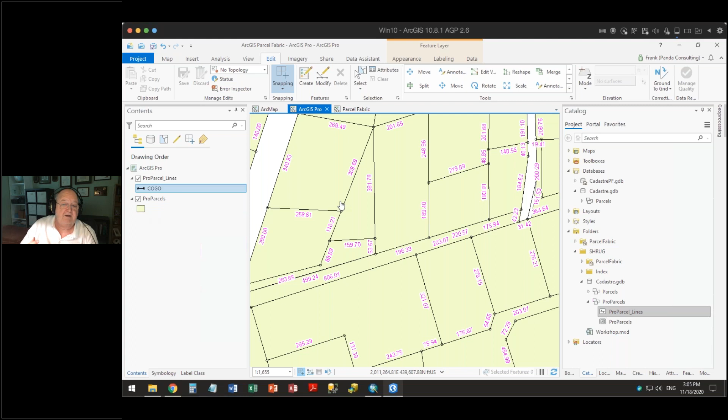One thing you'll notice is there's an awful lot of similarities between them. While the interface is a little different, they can work on the same data with a couple of exceptions. This is ArcMap here, and over here is ArcGIS Pro with the exact same data in a map. This is the ArcMap data, and right next to it is the ArcGIS Pro data. Excuse my horrible green coloring, but I wanted to use that to start with something for symbology, and over here is the parcel fabric.

We can go ahead and close this, we don't need that parcel fabric in this workshop anyway. All right, so just to start, I'm assuming that since this is a parcel mapping workshop...

...that we're somewhat familiar with terms such as COGO and things of that sort. I'm assuming that's valid. So let's just review a little bit about how the structure is on these feature classes that we're editing against.

If we look at the actual line feature class we're pulling in here, we have some standard COGO fields: angle, distance, radius, delta, tangent. Then we have another field called record boundary type, which this county actually had populated. Then we had side, arc length, and dim code, and it looks like they'd done some work to find the nearest other feature.

But let's start with the angle. The angle actually represents the bearing of a line. A bearing denotes what direction a line is, and it uses, in most parts, a quadrant bearing, showing the angle from north toward the east or north toward the west, and from south toward the east or south toward the west. You'll notice here, and this is the biggest difference between ArcMap and ArcGIS Pro...

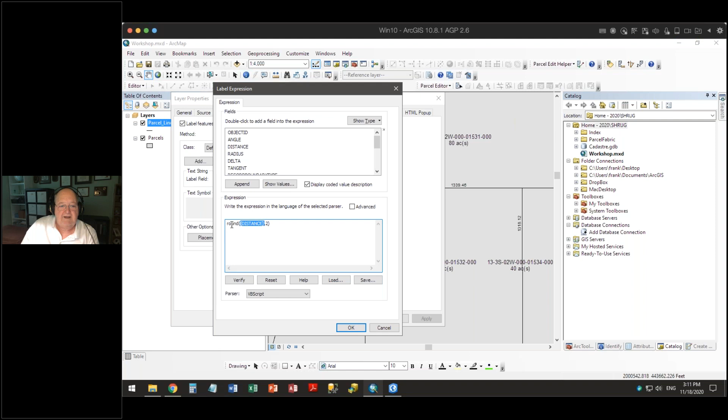For example, if I have a label on here, which I do have on my lines, I can go over to my labels and define what my expression is. I can see that for my label, in VB script, I've told it to take the value stored in the distance field and round that value to 2 decimal places so I could show what the actual distance is here.

So when I am beginning to draw something on here, I would start by editing. Then I would make sure that my Cogo attribute field, or my Cogo toolbar, is open, which is located here. And then I could go and begin a traverse.

Now in the traverse, one of the things I want to watch out for is whether or not my units have been set in my actual ArcMap session. So I'm going to go down to my editor options, go to units, and make sure, this is normally what happens, I need to go and set it to quadrant bearing and to degrees, minutes, and seconds, and hit apply. Notice there's also another section here, ground to grid correction.

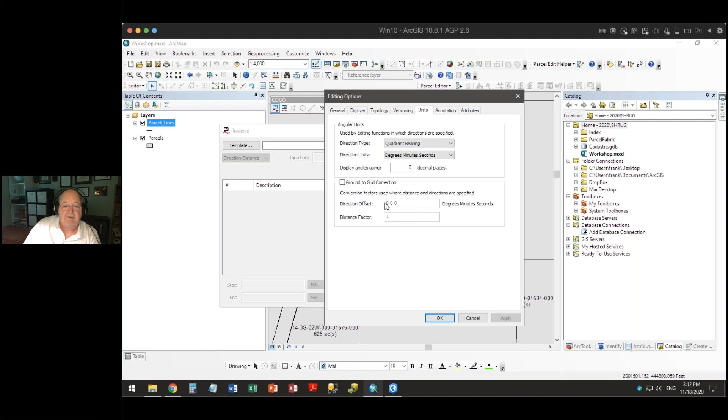If it turns out that I'm using ground bearings or ground distance, and I wish to project it up to the grid, I can go and tell it what my bearing offset is here and what my scale factor is here also. Most organizations don't get involved that closely on it.

So now I need to set my template and say I wish to go and utilize parcel lines on here. And why is it still not working? Set those in here.

Interesting. Oh, I need to, I guess, start my start point. I have to tell you, it's been so long since I've used ArcMap. And then the next thing is I need to put in my bearing.

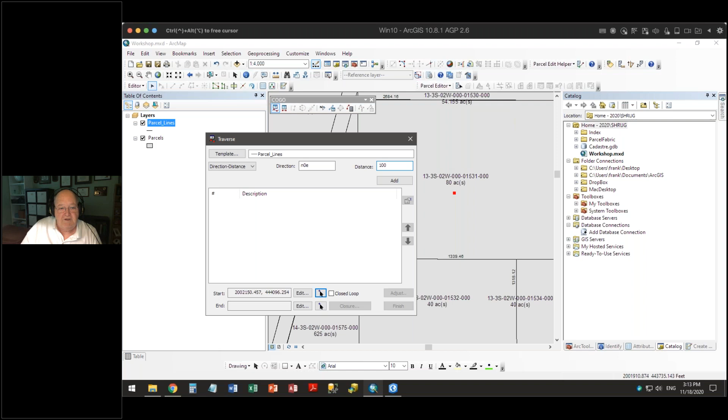In this case, I'm going to go north, 0 degrees east. I'm going to hit tab. And then tell it I wish to go 100 feet north and hit enter, and that will go and input that value for me. I can then say north 90 degrees east and hit enter. Then I can go south 90 degrees east and hit enter.

Oh, sorry, that should be south 0 degrees east. One more time here: south 0 degrees east, and then I can go south 90 degrees west for 100 feet to close out. An interesting thing about this is that I have not yet created anything.

This is merely creating a sketch for me. It's creating a sketch, and it's only when I hit finish that it actually is going to go and finish on here. What I'm going to do is take and save this traverse out.

And real quickly, I'm just going to go and save it to here, call it test traverse. And I'm going to save that, and I'm going to pull it in later when I begin doing this editing. So only when I hit finish do these lines actually appear.

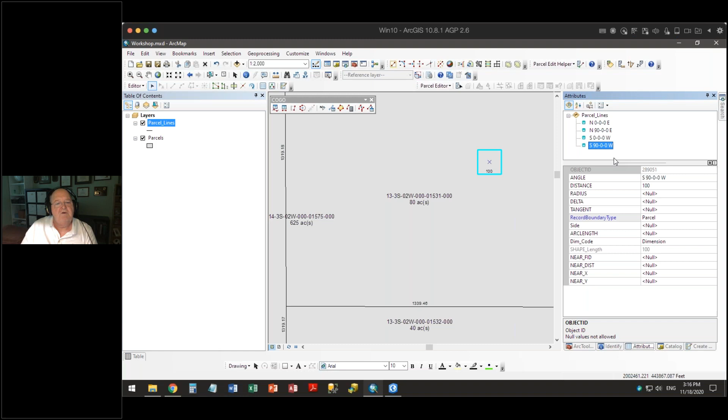If I look over on my attributes, here are my lines for me. So if I wish to go and move that, what I can do is, I can see, by the way, I have a selection anchor here. I can hold down my control key and move it down to and snap to one of the corners there, and I can move this down and snap it in place there.

So I can go and draw this, make sure this matches. And then I have the problem of, well, how do I make sure that this bearing in here matches exactly where it's going? And then down here, how do I go and do this?

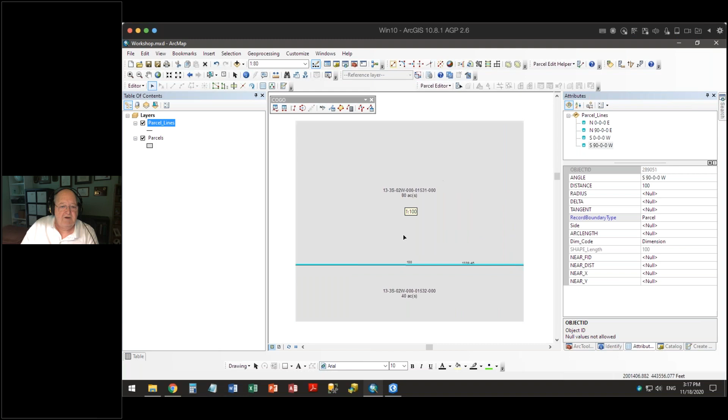Inside of ArcMap, we found a lot of ways to cartographically do this. One of which we might go and, rather than starting and just doing the open traverse, we might rotate it or move it down, but we can see already that these lines don't coincide with the adjoiners. So we'll have to do some sort of an adjustment on here to make sure that this fits exactly where it's supposed to fit. So let's go and push this up here.

I can go and do sort of just some standard edit routines on here. And I can take this again and say, well, let's go and edit the vertices, and I can move those vertices down to here.

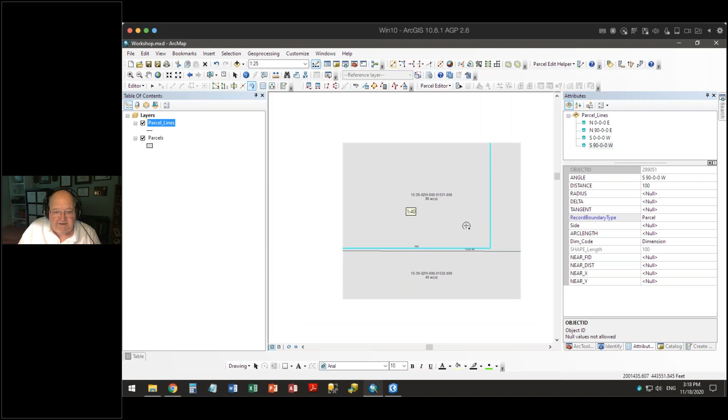There's a couple things I can do. I can go in and do a rotate on here. It will use whatever my selection set is and give me, there's my rotate. And when I go over here and I hit S, let's make sure I can toggle this. S, it gives me a snap line.

I go in here and then rotate that so it fits in there. Again, that made one line fit. If I click over here, I can see that line doesn't fit anymore. So let's get out of here and instead select this line and select this line. Let's rotate just a single line instead so that it fits.

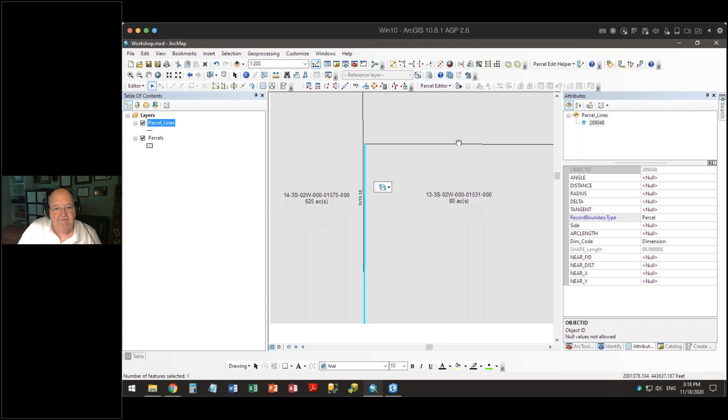And let's extend the other line on here. Again, I tell where I want to rotate around, then go and hit S to get my second snap. Make sure I get on my rotate tool. Here's my second snap anchor.

I can go and rotate it and have it fit. Now this line here has not been extended yet, so I have to go and extend that all the way to this line here. Again, a couple ways of doing this. I can tell it that I want to go and edit the vertices and then extend it that way, or I can use an extend button and do that. But again, these are standard type of edit tools on here.

Once I have that in place, I can now go and select these lines, and I hold down my shift key in here, hold down my shift key to unselect the other elements in here.

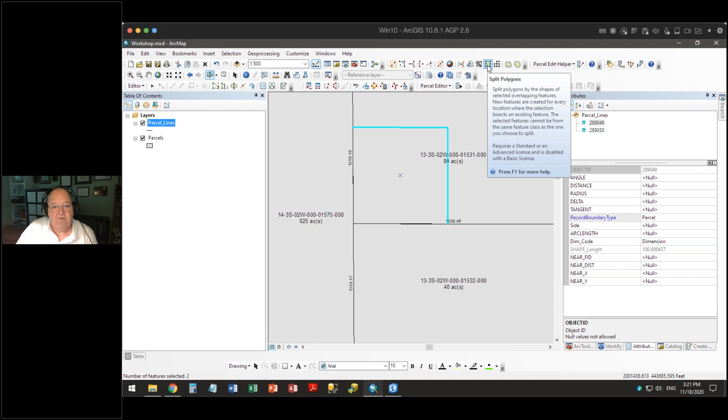So now I can take this and I can go and split this. I can do a split polygon on here. So polygons I have here. And I can split the two polygons in here, just having the same attribution. I then go in here and edit this, and maybe this is 5.2 here, and my acres, 1 acre or whatever it is.

Right now, this isn't much better than just simple drawing, and I liken this to what happens when we go and use just very fundamental tools. This is cartographic mapping is what we're doing here more than anything else. We're just mapping the cartography on here. So I'm going to get out of here and go over to ArcGIS Pro instead.

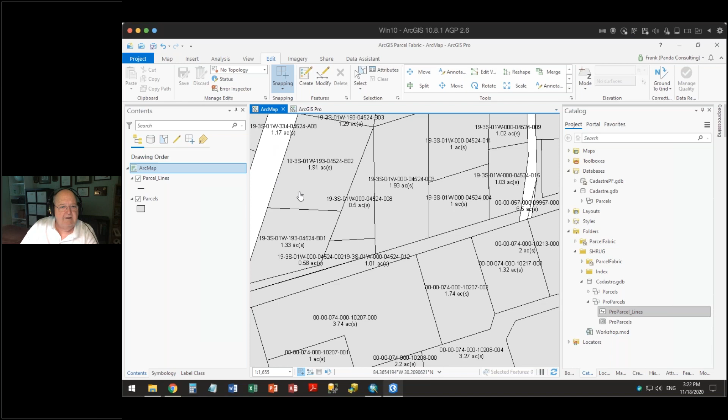And I'm going to go and find someplace. Let's go back here. I'm going to go to ArcMap to locate. I'm going to go and tell it to go and locate this parcel here. And you can see how quickly it zoomed over to that parcel.

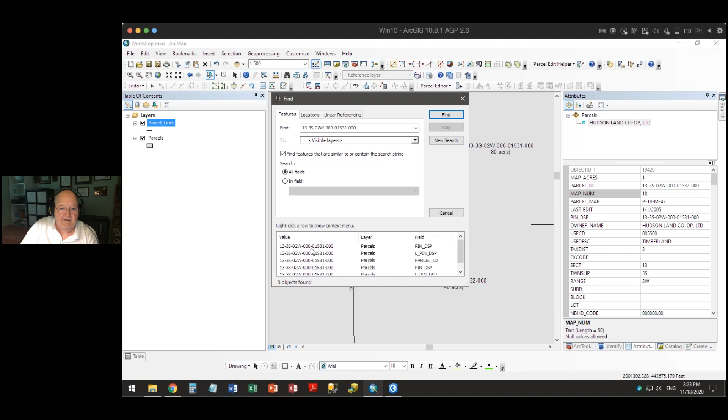Inside of ArcGIS Pro, it's the locate tool. The locate tool is located over on the map ribbon over here. And you can go and search through every single layer you have in here. With this, you can tell it what you want to match, how you want to match it and such. Actually, the locate tool is much faster in there. But let's do the same thing that we just did.

Let's start with comparing the structure of the line feature class. Because I can tell you already, the polygon feature class is exactly the same. There's no difference in here. But the line feature class, there is a difference.

And the first difference you'll notice is, how do I get at the properties of this? How do I get to look at this? In this case, it's a data designer, and it allows me to go and look at the fields that are in here. And when I look at the fields, I can see I still have an angle field. And that angle field, in this case, is still text.

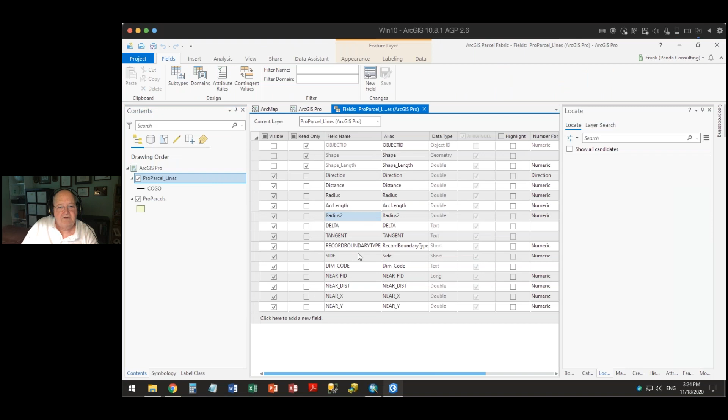But when I go to Pro, that line feature class, instead of being called angle, it's now called direction, and it's a number field. If we look down here, all the distance field, the radius field, the arc length, radius 2 field - these are all number fields in here.

And the number fields themselves can be set as far as how many decimal points we want after it, whether we want to pack it with zeros, whether we want a separator on it, whether we want a suffix on it. Maybe we want to go and put a suffix on here when we go and see these in our attribute tables and such.

So the first thing is the difference between the structures as far as the line feature classes. The line feature classes inside of ArcGIS Pro, whether it's just standard Pro or whether it's Pro Parcel Fabric, the COGO attribute fields are actually number fields.

And why is it number fields? Because Esri has recognized that when you use line and when you use number fields, you can actually begin to evaluate and analyze, and you can calculate what's the difference, what's the variance between the distance that's stored on the deed and what it's actually mapped out as, or what's the difference between the bearing or the direction and what it's actually noting on the deed. So you can begin to do calculations on there.

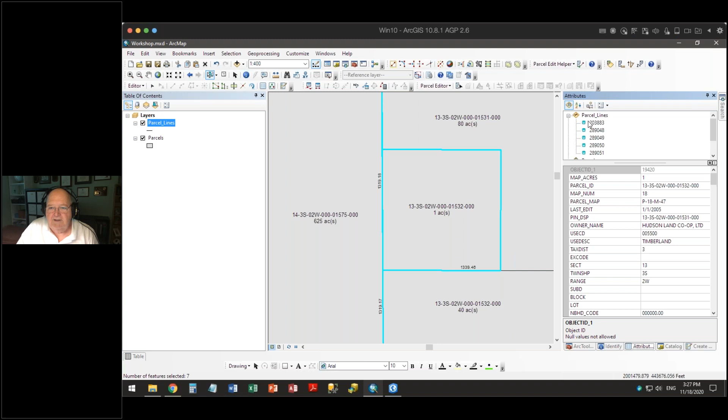Now we don't want to save that. So let's look at the next thing. Once we have that in place, I just want to make sure I have this correct here. And look at my lines - they have the distances stored, but they don't have an angle stored on them. So for some reason, it didn't store that on there for me.

When I go over here and I want to go and create a traverse on here, the way I start is, again, I want to make sure that my units are set correctly. So I'm going to go to my options and go to my units, go to my distance field, make sure it's set to feet. My angular units are degrees - let's make them DMS. Area units are going to be set to acreage. My direction units are going to be set to quadrant bearings.

And then I'm going to go back to my actual document. Another thing you'll notice is that with ArcMap, I had to start editing, then I also have to save edits. Within ArcGIS Pro, by default, there is no start and stop editing. If I have opened up a data set, by default, I can start editing it immediately.

Now, if you don't do a lot of editing, you may not want to go and do that. And there's two ways to achieve that. The first is over in the table of contents area, there is a tab for editing. And if I uncheck these layers, these feature classes, it will not let me edit them. So I can bring things into my project file but not edit them - I can turn them off and it works fine.

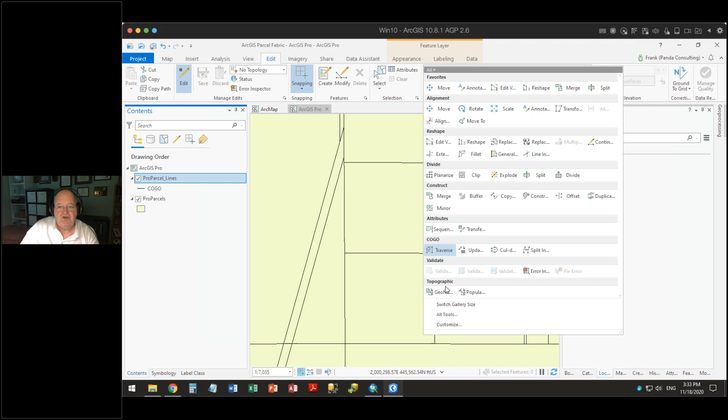If I pull that down, it will show me all the tools that I have. I can actually switch the size of the tools in here to see them a little bit bigger if I'm having problems with them, and I can scroll down and see all the tools in here. I actually have a traverse tool here.

But in addition to that, if I pull this down and say show me all tools, it turns out that there's a pane in which you can go and have every single tool here. And you have the same option - you can make this small items, or you can make this a list of just the tools that you have as you're getting used to this. I'm still not sure what my preference is on that.

But there's also another thing in here - you have all your standard tools inside of ArcGIS Pro, but then you can also create your own tools, your favorites as far as what you're editing. That's as simple as going down to the tool that's yours, right-clicking on that and saying add to my favorites. And now when I go back up, here's my traverse tool, the tool that I use all the time, so I can go in and begin with that.

So now let's start. With this, remember again, my COGO fields are not text fields - they actually are real number fields. So I can start the same way I had to start before. I have to set my standard direction, and I can do the same thing - I can input these values in.

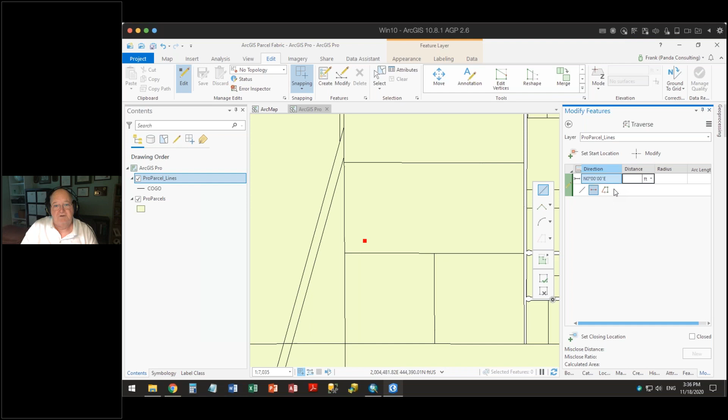So here is now importing this. I could go and put north 0 degrees east, enter, not tab, but enter. And I did 100 feet and hit enter. Now, one of the main differences here is that inside of ArcMap, every time I put a course in there, it was creating a sketch. In this case, it's not creating a sketch. It's actually creating that line every single time I hit enter, creating the line on here.

So now I could go in and type out, well, maybe it's north 90 degrees east on here for 100 feet.

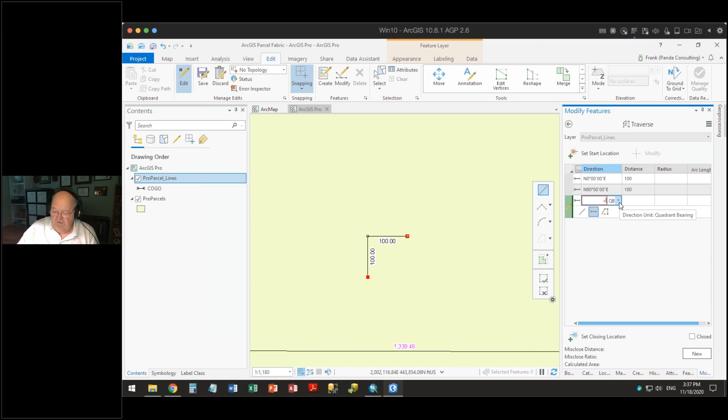Or I can type out how much of a deflection angle. A deflection angle is when I start here and I turn to the right. Deflection angles to the right are positive, deflection angles to the left are negative. So I could go and type in here, well, maybe I want to go plus 90 degrees, 100 feet, and maybe plus 90 degrees, another 100 feet.

And this automatically will tell me that it closed and that it's 0.23 acres enclosed inside of here. Notice it's automatically labeling it for me also, so that's just part of what's coming out of here. So when I'm done, all I really need to do is get off of this pane because it wrote that every single time on here. So I don't have to go and hit finish or anything else in here.

So here's another big difference between ArcMap and ArcGIS Pro: the way in which you select things. Inside of ArcMap, when I select it, I can draw a rectangle and do a selection, and every time I do that, it goes and makes a new selection. But in ArcMap, if I hold down the shift key and then do a selection, it would take off what I've already got selected. Not in ArcGIS Pro. In ArcGIS Pro, to remove something from a selection, you hold down the control key and do that. Shift key adds, control key removes.

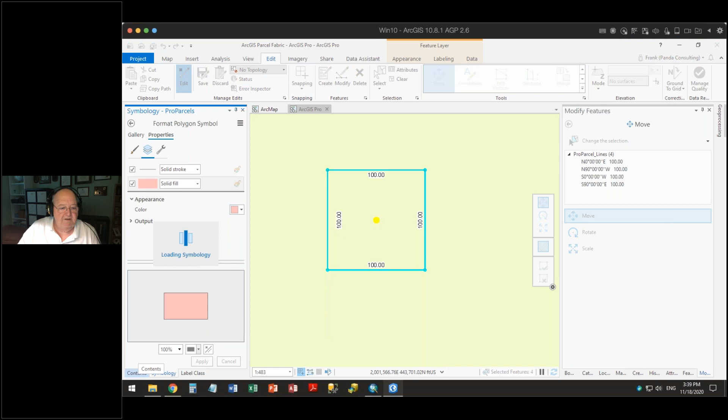So now I've gone and got that in place. Let me go and move that now. We go and move it, and you'll note also, rather than, let's change the color on here. Instead of green, let's make this something that might be a little bit easier to see. All right, you'll see this yellow dot here.

That's to replace that crosshair that was in ArcMap. If I hold down the Shift key and move my cursor over it, I can then go and snap it to this point here. I can then, while I'm clicking on top of the dot, go and move it down to there. And notice it's not finished until I actually click finish my move.

And I should see the exact same issue here, and the exact same issue here, and how to go in and make those fit.

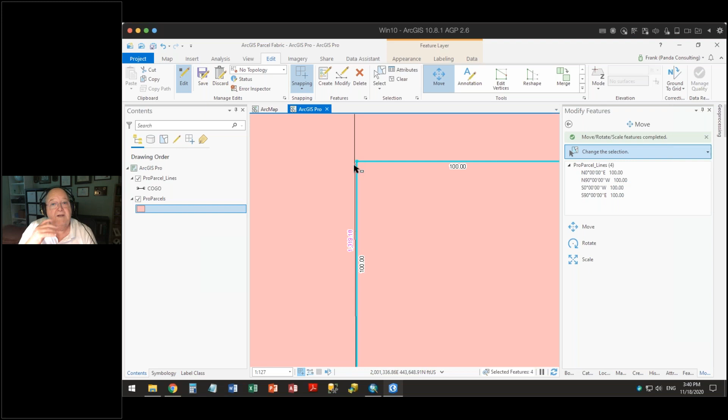I could do a rotate, and again, rotate is much like it was before. Hit rotate. Instead of that X, that little crosshair, I now have this. I pull this down, snap to here, and I can rotate by either holding down in here or holding on the actual feature that's selected. And if I note, as I move my cursor over, it's showing me I can rotate from there, or I can rotate from there. But if I try doing it in here, it's not going to rotate. Same way with the old way.

If I wanted a second snap key, I could hold down S. The difference is now I can, wherever my cursor is, that's where the snap key becomes. So then I can say, let's move that down to here and say, rotate it until it snaps to there and finish it there. But that's not the most efficient way of doing this.

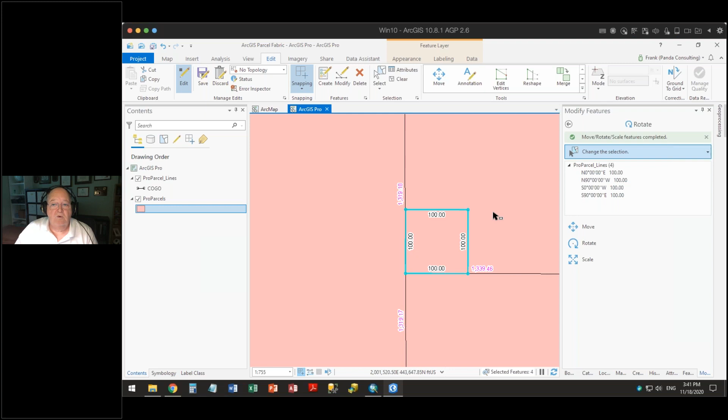Inside of ArcGIS Pro, we have some new tools, one of which is called the Align Features tool. Now, what this Align Features tool allows us to do is to go and draw a path, an alignment path, and it will go and find everything that's inside the tolerance that we input here. I'm just going to put 5 foot just so we can see.

And I can say, let's draw a path, and this is pretty far up here. Make sure that it goes and coincides with that boundary line. And if I look, I now have told it that everything that's inside between this buffer here, this tolerance, I want every vertex to go and snap over to this path that I just drew.

All right, and I can tell it things like both sides, left side, right side, preserve the shapes. I'm just going to go and do the simplest one here and say, go ahead and snap that over to it. And if you note, it went and automatically moved the vertices over so that they were in alignment to that old existing boundary line.

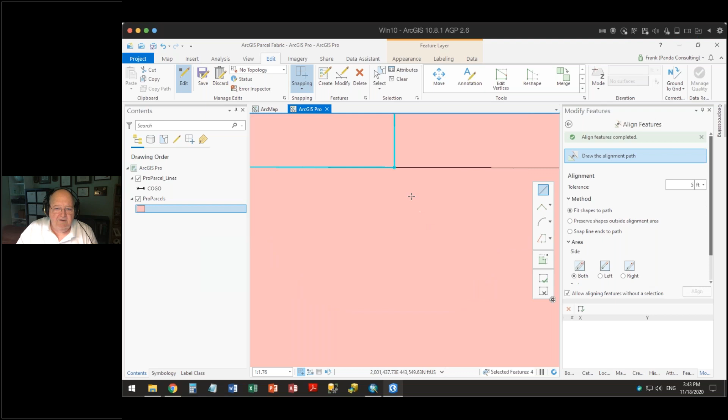Well, what did it go and rotate? How did it do that? And if I look here, it didn't rotate it. It's still the same. But what it did is it took that other line, those 2 lines there, and modified them so that they are extending out to that exact same line on there.

All right, simple traverse on here. Again, I can save the traverse. I can recall this traverse on here.

One of the things you'll also note here is that with my labels, some of these labels are black and some are red, pinkish color. Why is that? Well, it turns out that the labeling of the lines in here are done with a label routine for Arcade.

If I look at the label properties on here, this is the Arcade label expression. Remember, the values that are stored are actually number fields, so it's storing true numbers in here. And this is Arcade, by the way. If you're looking for a language to learn, this is the one to learn.

This is used multiple times inside of all of ArcGIS products throughout there. But it basically is a subset of JavaScript that allows you to go and set things such as whether or not you're going to show the bearing on here, what parameters are you going to put on here, what error strings are you going to put in here, what's the format, what's for color and what's for what, what happens if you have invalid COGO on here?

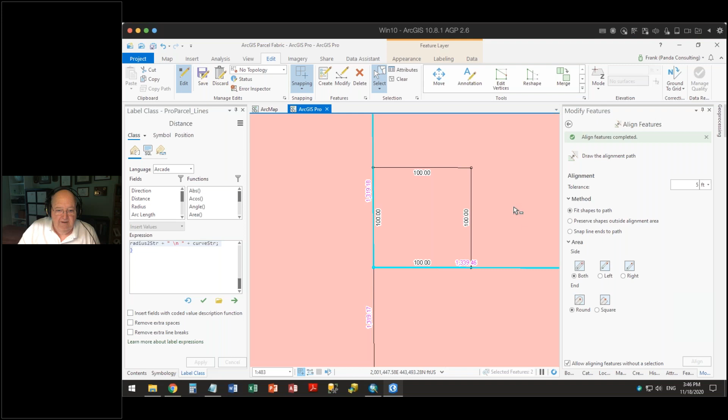And to prove that, let me go in here and select that one line that I have here. That's this line here. And let me go and type out a bearing on it and say, well, let's just say this is north 90 degrees. When I do that, it immediately changes from red to black, because it now has valid COGO on it.

So inside of ArcGIS Pro, it can tell you whether or not it's got real COGO values on it, or whether it only has partial, or whether it's not valid as far as everything that's in there.

Let me go by here one more time, just to show you the flexibility here. If I turn it on and say, don't just do the distance, do the distance and the bearing on here, it will actually go and, without making any major changes, because it's calculating it from the values that are stored, it will go and change what's actually being displayed.

That, by the way, is list by labeling, and it tells you what's being labeled, sort of replaces the label manager.

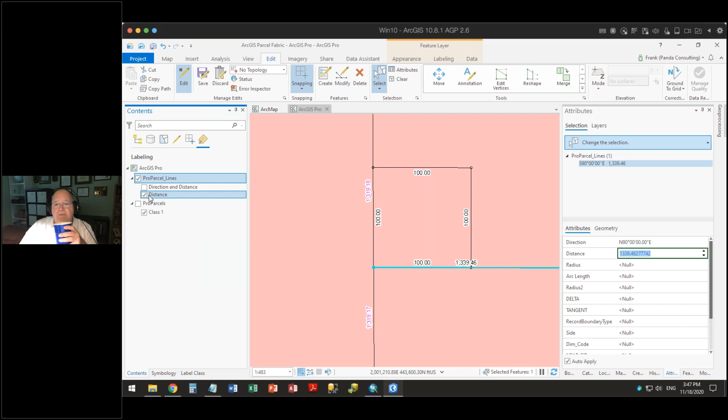All right, let me get back to where I was before. Let's unselect these things. Let's have just the 4 lines selected on here.

Now let me go and do a clip against this to go and calculate where the values are here. Again, I can go here and say, show me, where is clip? The clip on here. And I have an option to say, what are you going to clip out? In this case, I'm telling it, clip everything that's available to clip. So we'll clip the existing polygon layer, and we'll clip the lines in here.

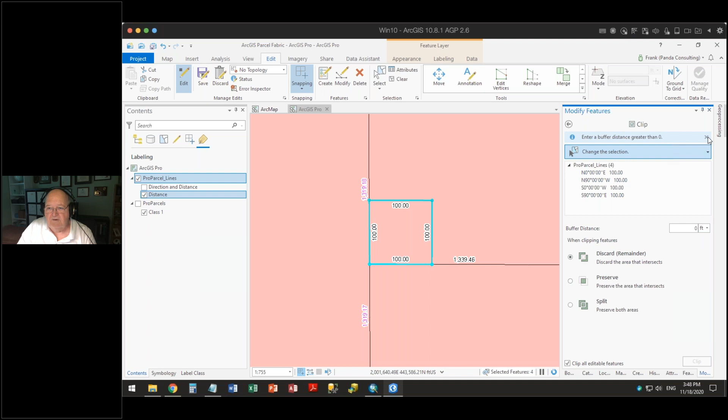So it will give you new information on here. And here's the buffer. And let's change this. Here's what I'm going to clip. And then the question is, I guess I have to have something turned on.

So everything is editable in here. Interesting. Let's do it with a split instead.

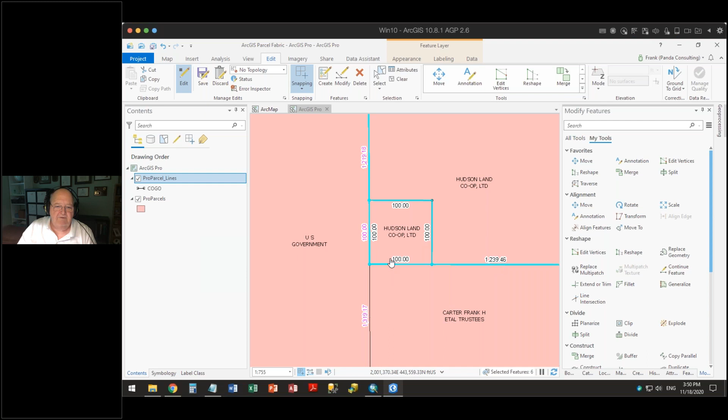And let's split these, and I should be able to split here. There's my lines, and this is what I'm going to split out. All right, and here's my parcel that is going to split. So go ahead and split these. If you note, it took this 100 foot and subtracted it off of here.

So I now have this line split, and here's the remainder just to prove it. Let's go back, 1339, 1319, and then let's go back and redo the split, 1239, 1219. So it automatically went and split the polygon on top of it and gave me a new parcel here, and gave me the remaining parcel.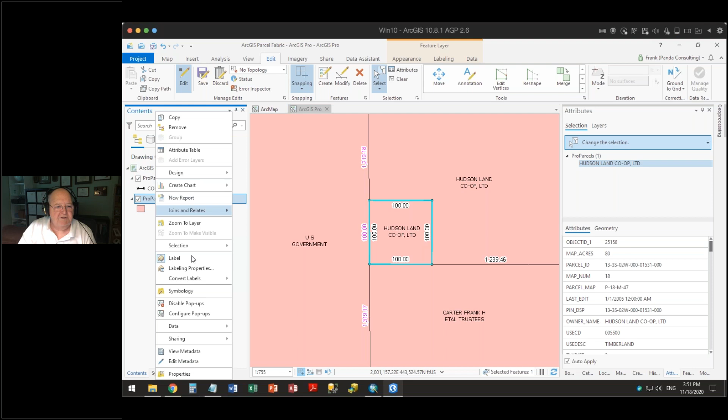All right, so I can go and put the new parcel identifier on here. Let's go and change this so that we actually label not the owner name on here.

Interesting, note that this is an Arcade expression, not Visual Basic. By default, Arcade is what's used in ArcGIS. So let's go and put this here and have it show those values for me.

Well, let's explore this a little bit more because this is not Visual Basic, this is Arcade. So first of all, let's change this so that that's 2 there.

And let's explore this a little bit more and create a label with this that shows not just the parcel ID, but maybe it has a new line in there, and then after that new line, it has the acreage in here.

So inside of Visual Basic, I might do that by creating a VB new line and then taking the shape area, dividing that by 43,560, and rounding that to 2 to get it to work. Inside of Arcade, slightly different. I'm going to use a plus instead of the ampersand to concatenate things together.

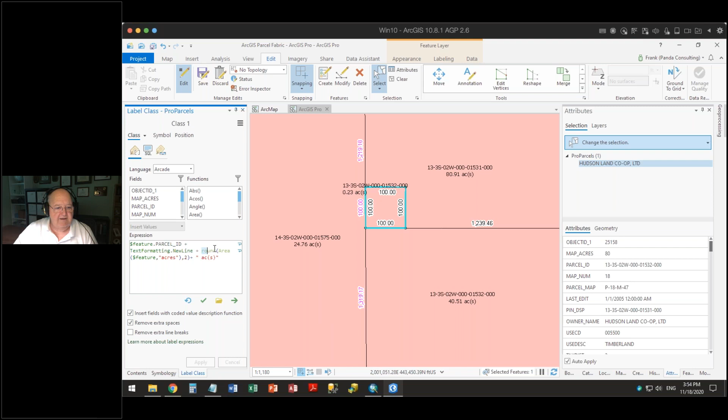So again, just to show you some of the techniques that are in here for doing labels inside of ArcGIS Pro versus labels inside of ArcMap. The more flexibility you have in here, the ability to use, in this case, a property of the polygon object that I can use.

So that's just a simple clip where I do a traverse, make sure it lines up, and then split what's underneath there and put the information on here. But there's more inside of Pro.

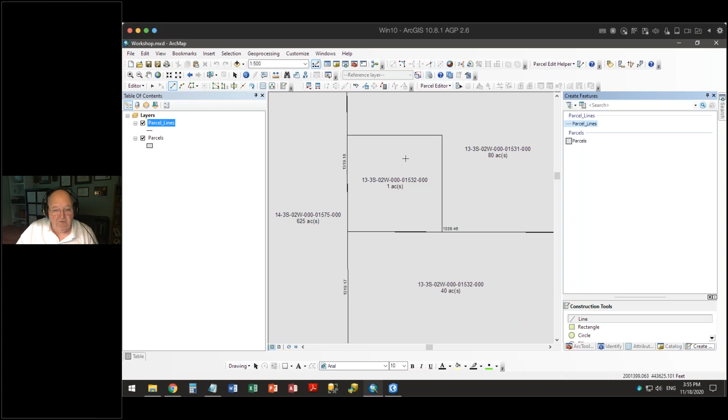For example, if I'm in ArcMap and I wish to see where the vertices are located, what I can do is hold down a key while editing. Let's go in here to create a line. I can hold down my V key, and it will show me all of the vertices that are within about 500 pixels of my screen.

Well, that's really not real helpful. Perhaps I want to show every vertex all the time. Inside of Pro, you have the ability to do much more sophisticated symbology outside of here. So what I'm going to do is symbolize my polygons.

Now, the first thing I'm going to do is click on that symbol and say okay, let's do a couple things. On my properties, I have the normal symbol, I have my layers here, and I have my structure. I'm going to go in here and create a new layer, a marker symbol on my polygon feature class.

And then I'm going to go back to my layers here and actually symbolize this. What I wanted to do is take this marker and make it green, and make it, let's say, 5 points. But the difference is I don't want to put it all through here, I want to just put it on the vertices of my polygon.

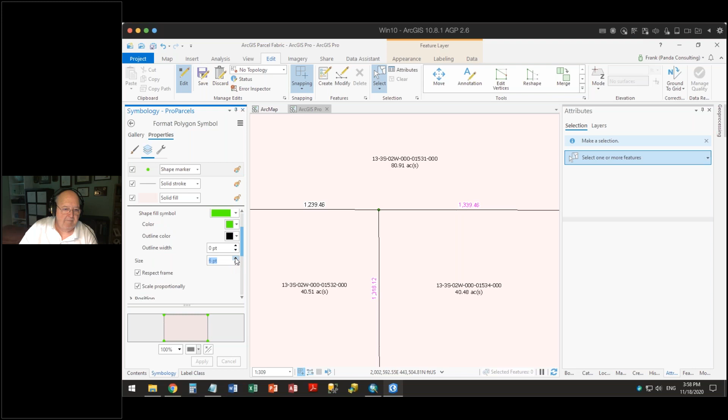That there are my corners. Let me make it... there we go. There's my actual vertices that are inside my data. So I can look at this and very easily see where the vertices are if I want to snap on them, if I want to go and do any sort of editing in here.

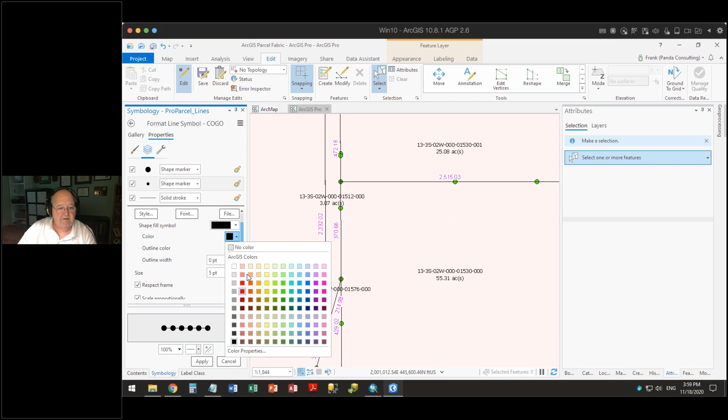Note I can actually do the same thing for my line feature class. If I wish to, I can go in there and add, I'm going to actually add 2 symbol markers here. I'm going to go back here, and the first one, I'm going to make 5 points, and I'm going to make it red. I'm going to put it on the extremities of the line. And the second one, I'm going to make green, 5 points, and this time I'm going to put it on the vertices of the line.

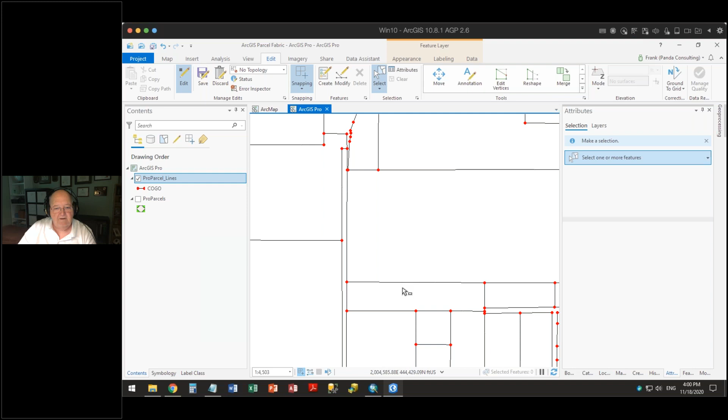So you'll see here, I can see not just where the vertices are, but where the ends of those lines are. All right, and now if I turn off here, I can see here's the endpoints of my lines. And do I have any vertices on here? It doesn't look like I do. So let's go and take a line and let's edit a vertex and create a vertex in here. Just to show, it will tell me whether or not I have any interim vertices on here or whether it is just one straight COGO line between them.

Excuse me, Frank. Yes. We did have one question come in, and I copied it down into the chat room as well. It was asking, when modifying two lines when using the Align tool, are the lines coincident when the tool finishes to edit? Yes, they are.

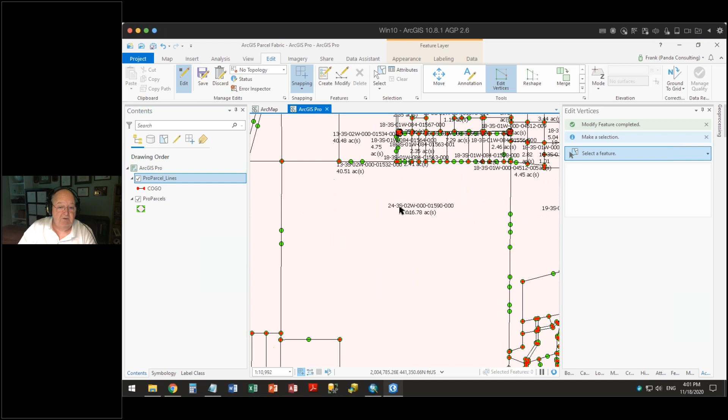Actually, that's exactly what we did, is we said, make sure that when you use this Align Features tool, everything is going to be on that same alignment. And that's a really good question, by the way. I'm going to show you that that Align Features tool is one of my favorite tools in here.

So let's go and start and create a couple lines and just show you that here's one line, and then here's another line. All right, so we've got two lines in here. And I'll stop that. And now let's go and use that Align Features tool, if I could find it.

Reshape Align Features tool. Now in this case, I'm going to go and draw an alignment, and that alignment, I can say start here and make it here. Now remember, it's going to go and use whatever my tolerance is. And if I go in here and just set this tolerance out, I don't know, 50 feet, that's not enough, because those vertices have to be inside there. Let's call it 150 feet.

There we go. So if the vertex is inside of the tolerance, it will go and move all the vertices to that line. So when I say go ahead and line these two up, they will be aligned in there. And to show they're actually two lines here, let's get rid of this thing here. There's two lines in here: there's this line here, which is a shorter one, and then there's this line here, which is the longer one. So to answer your question, yes, it actually goes and will pull it fully into alignment with it.

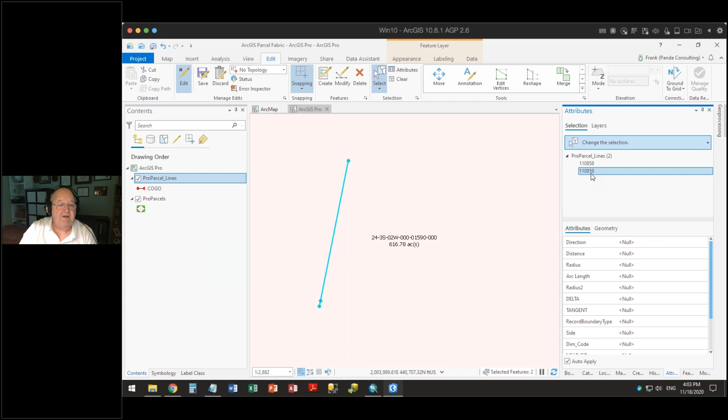It also will not do an extend to go and recreate where that line was. Matter of fact, if we go back over to, where was I? Come on. I forgot where I was. Here I am.

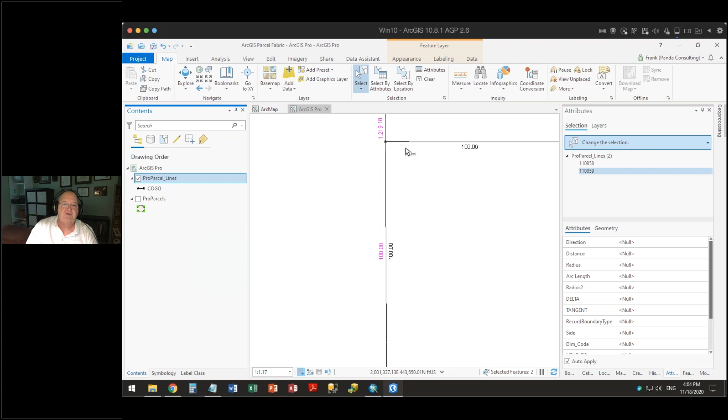So if I look at this line here that I have, and remember, I am symbolizing the vertices now, so I can see whether or not there's a vertex there. There is no vertices there. It does not do the traditional extend. Rather, it goes and actually moves that end vertex over so it's coincident with it. So normally, if I were to go and draw a line, again, let me go and create a line here and put it to there. Yeah, my luck. So let's go in.

Edit the vertex. Let's pull it back here just so we can see that it's there. When you do the traditional type of extend and trim here, what it's actually going to do is it's going to go and extend that until it goes and intersects with that line there.

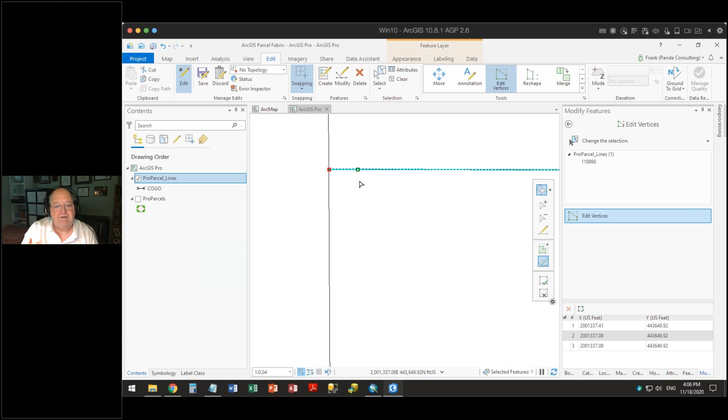So we would go in and do that. I can see that the normal type of extend actually left the original vertex there. The Align Features tool, because it's actually moving the vertex, does not leave that little old vertex in there. It actually just sort of extends that line without creating or leaving that residual of where that original distance was.

Thank you for that question. So some of the other tools, the other differences that you have on here, and the one that's most fascinating to me is this one here. This is a series of vertices within a curve. So in fact, it looks like what's actually happening here is there is a densified curve here.

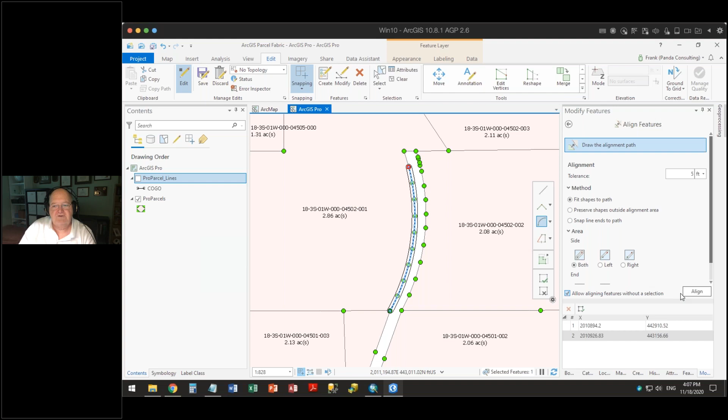Well, with that align features tool, we could actually say we don't want 150 feet anymore, maybe 50 feet or 5 feet. We can go and draw a curve here and tell it to automatically replace the geometry of everything that's on there. So it will go and take and remove that densified curve on here. Just to prove it, we'll zoom in and go back here - it's a straight line from here to here, and then we can go back and it's now a true curve on here.

All right, so that is now a true curve in there. And in order to, for example, take those extra vertices out, or as I just created there on purpose, I now have a gap where I can say take these to here and pull them all together. So I can clean up my data using this one simple tool, this align features tool. I can remove extra vertices on there, I can close gaps between them. And again, just to prove that, I can take this parcel here.

And I can say edit the vertices on this parcel. Go ahead to there. And then let's go in here again and do align features. And let's draw - this is actually where we want this to go. As long as I make sure that, it doesn't have to be that big - as long as the vertices are located inside my tolerance, it will pull them all together and make them contiguous.

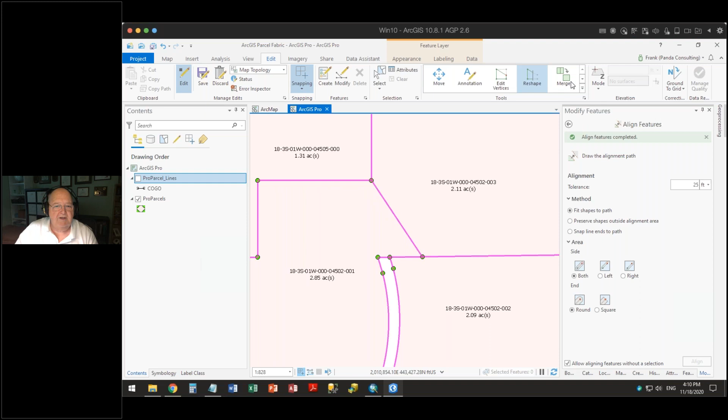Another tool that we have here is if I go and turn on map topology, I now have the ability to do what's called Align Edge. Aligned edges will show me every single edge and allow me to move over an edge and say, take the solid edge and move it so it's coincident with the one that's dashed. And I go in here and it has now gone and made those coincident without a selection.

I go in here and just go through and clean this whole thing up as I'm going. So here is a densified curve, by going and doing align features. And again, I only need like a 2 on here.

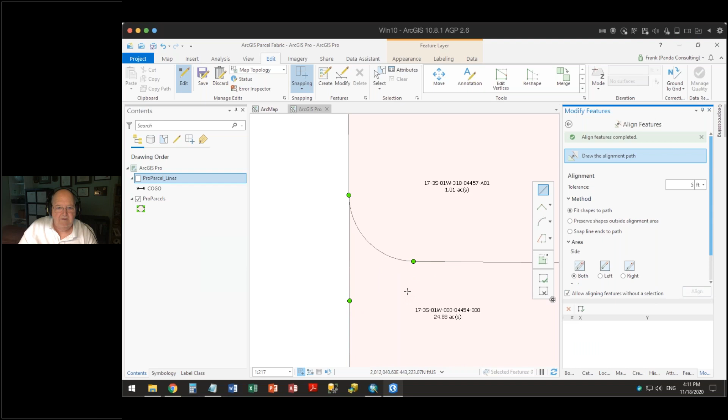Let's go and do an endpoint curve to here, and then let's go back to here. Let's go ahead and clean it up. I guess 2 wasn't big enough for this - let's try 5. There we go.

Same thing here. Again, one of the advantages of Pro is you get much more advanced symbology on here, so I can symbolize where the vertices are on my data. So I go in here and symbolize this and say...

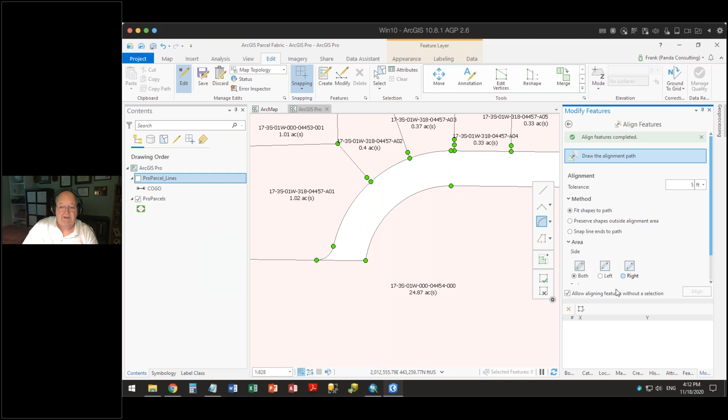Then I can come back here and make this a curve to here, so go ahead and clean that up. Do the same thing here to the end of that curve, clean that up. So those are now true curves throughout here. And it will do that for every layer that is turned on and is editable. So if it's editable, you can use this tool with this option to not necessarily have to select your features and just go and draw this in here.

So again, to your heart's content, you can go in here and clean up and get rid of all the extra vertices. Let's make this square at the end so we don't do anything there. I can clean up all my data and get rid of all my vertices. That isn't even parcel editing, that's just standard ArcGIS Pro editing.

Some of the other things we can do in here, especially as it relates to parcel editing: if we have two parcels, there's also the merge command. The merge command allows us to take two parcels and make them one. We actually have two options: we can merge them into an existing feature, or merge them into a new feature.

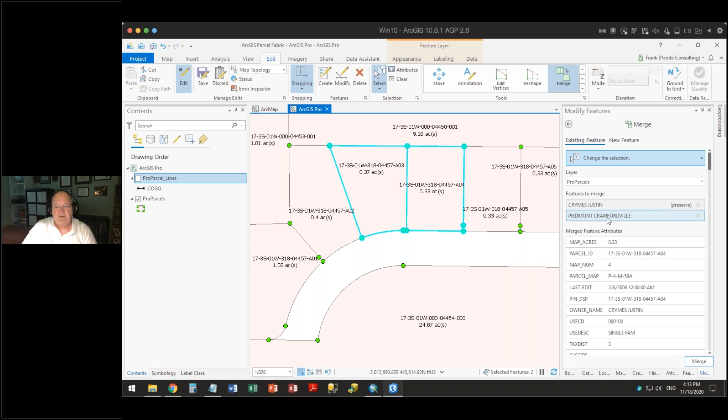If I merge it into a new feature, it will take the old ones, allow me to keep them, and mark them historic if I have a historic layer somewhere. I'm just going to merge into one feature and use the attributes from this one for both, and it will merge them all together. So from a parcel mapping standpoint, that is a combine, where we take two parcels and make it one. You saw how easy it was.

Well, what happens if I next want to have the west 25 feet of this adjoining parcel come into there also? So I can take this parcel, and there's a command called divide.

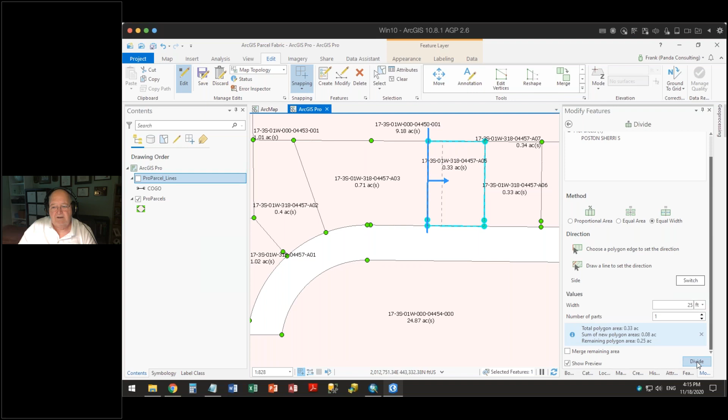The divide command knows whether I'm dividing a line or dividing a polygon. I can say I'm going to divide this into equal widths, and I said 25 feet. Then I can tell it I want to divide it off of that edge, and it will divide 25 feet off of that edge.

This allows me to select these two, merge them together, and merge them into this one now. So I've now taken 25 feet of that adjoining lot and merged it in. This is standard parcel mapping that gets done every single day, but you can see how much easier it is to do with ArcGIS Pro rather than the standard one.

So we've done a merge. We've done what's called an aliquot breakdown, which means take a portion of something else and then allocate it that way. We've also done a metes and bounds description, and then split or clipped out that underlying parcel. We've also shown you a couple of different ways to utilize some of the built-in tools to do cleanup on your parcels.

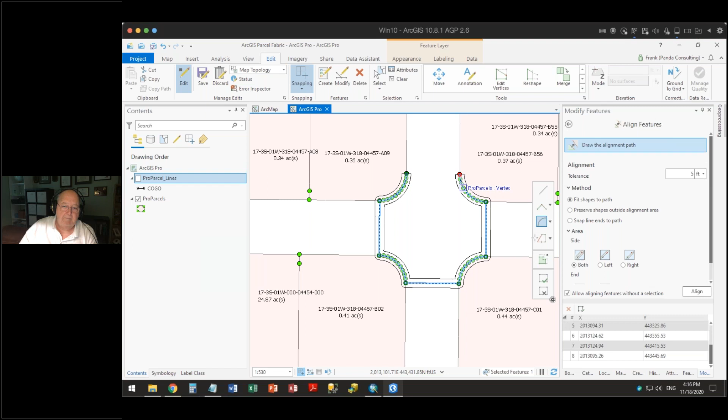By the way, I can do it this way if I want to be more efficient, and clean it up that way while I'm doing that. Again, if I had my lines turned on, which they're not right now, it would also clean up those lines at the same time.

All right, do we have any other questions, Dwayne? Anything coming in on questions or anything else we might want to show? Nothing has come in recently. Well, I've either put everybody to sleep or they're just mesmerized. I can't tell which right now. I'll go with mesmerized because I am.

All right, so another thing that often has to happen is you're looking to fill in areas between other parcels. Let's take one parcel here and fill in something where we have to split this parcel where a creek runs through it. So what we can do is a split, and we can do it interactively by drawing it out, or if we have that creek bed in another layer, we can use that to split this parcel.

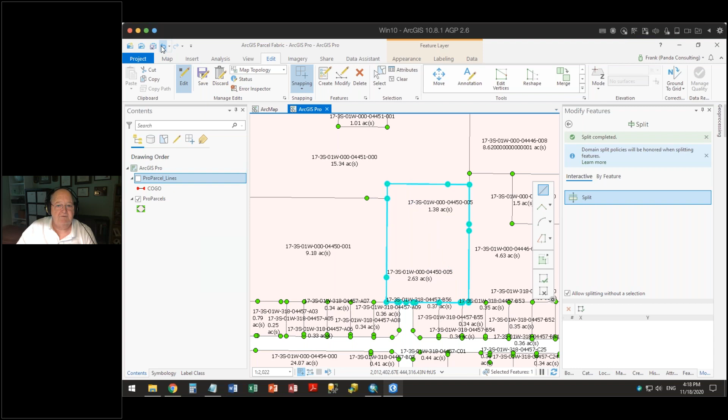But in this case, since I don't have it, I'm just going to do it interactively. I'm going to draw where this is to allow me to split my parcel to show the two different sides lying on each side of a creek. Notice it automatically calculated and updated the acreage for each of these. Let me show you again - there's 4 acres there. When we split it by the creek, it automatically shows us where the boundaries of those two parcels are.

See, the problem is, Dwayne, I can't hear anybody saying, wow, that's really cool, because some of this stuff is really cool. We had to put some canned applause and sound effects in next time.

There is a question that just came in. It said, Frank, is the attributes transfer function possible in ArcPro?

Ah, yes, it is. It's interesting - last year I was doing an ArcGIS Pro workshop, and that question came up. The answer is yes, there is in fact an attribute transfer function in 2.6. So let's show you how it works.

So transfer attributes is here. Now, we only have one layer, so there's not going to be a whole lot to show, but I can show you how to set it up and how it actually works, and since we have different attributes here, I'll show you. There's not a whole lot of interface, but if we pull this down for the options, we can see field mapping.

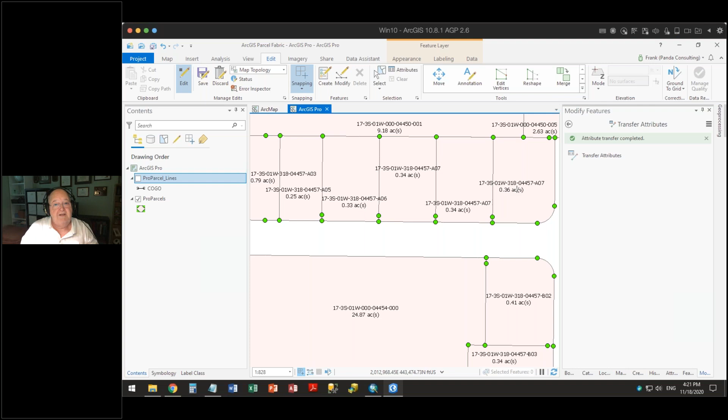Yes, ArcGIS Pro at 2.6 - this is actually 2.6.3 - has transfer attributes on there. I feel like a salesman, because now I'm going to say, but wait, there's more. Not only is the transfer attributes on here, but there's sequential numbering.

For those of us that were parcel mappers, we used to use an old Arc script called SnakePin, which lets you populate the parcel identification number. Well, this sequential numbering does much the same thing, in which we pick the layer, and then we pick the field in which we want that to show up.

If I'm remembering correctly, we're actually labeling the parcel ID field here. Okay, so it's the parcel ID field, and then we have this format - by the way, this is Arcade. This is telling me that any place there is a pound sign, make sure those values are calculated, and in this case it's going to start calculating on my start value and increment by 1.

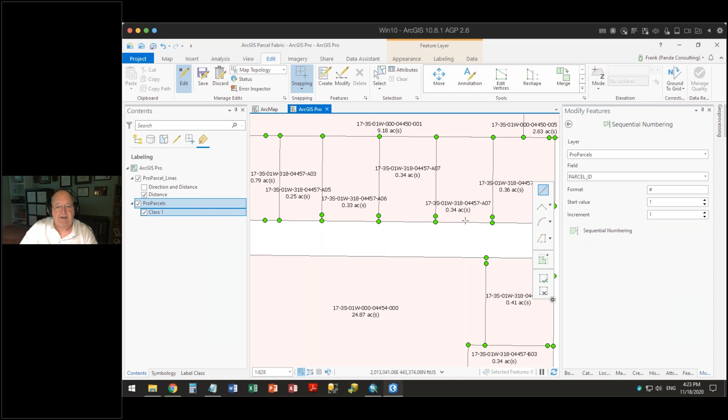Let's zoom out a little bit more, and let's just draw a line from here to here. All right, so now we can see that it automatically incremented and sequentially numbered the parcel ID field from 1 to 6.

But wait, there's more. Let's say maybe I have to have another number, maybe it has to be 3 characters long. So if I put 3 characters in here, and restart that again from 1 and draw it from here - now when I do this, they get padded with zeros to make sure it takes advantage of it all, so I don't have to worry about going just 1 through 9 and then 10 through 99 and then 100 through 999. I just put the number of characters that have to get filled in, and I can do that all the way without having to stop.

Or if I do have to stop and maybe pick up at the next one, when I stop here, it will tell me what my next sequential number is.

So I'm looking here and I see that this is 17-3, south-01 west, dash, 000 dash, 04454.

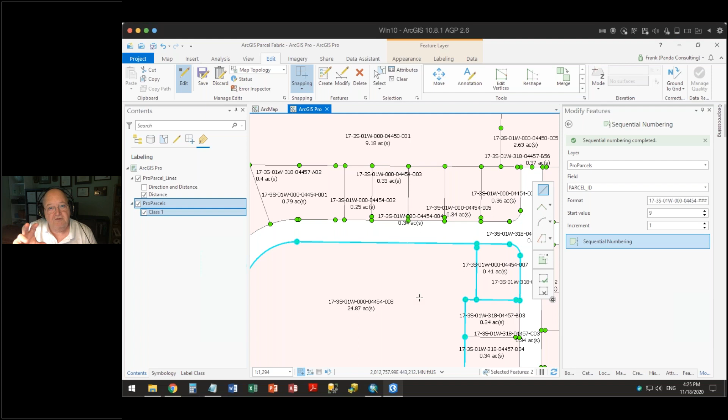You could also, perhaps this is not for parcels, but maybe you wanted it to be a lot number, whatever. Let's start at 1 again and go down through here. This is then lot 1, 2, 3, 4, 5. So this sequential numbering is a really, really nice tool, and it doesn't just have to work against parcels. It could also work against any other polygons that you might have in here.

All right, it's a good question. So let's go through some of these other tools that are in here, and I'm going to change the size of this so you can actually see them a little bit better.

There's the standard types of tools. There's edit vertices and a reshape tool, a replace geometry tool, multi-patches. Multi-patches are 3D surfaces in here. There's a continue and there's an extend.

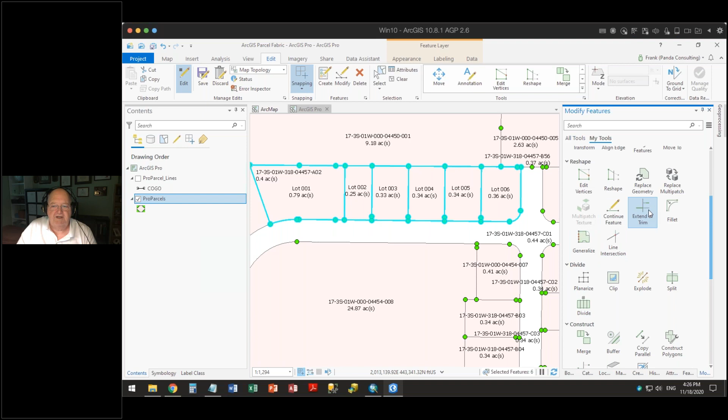Let's look at the extend function a little bit. I actually showed it a little bit earlier. Let me go in here and actually create some lines. So let me show you, this is a 2-point line. I can tell it not to rubber band after I do my lines.

All right, so now I've got a whole bunch of lines in here. Let me go back to my modify and this extend trim tool. Like so many of the other tools inside of ArcGIS Pro, at the very bottom here it says do this without a selection. I'm going to turn off my selections to prove it, so I don't have any selection here.

Now, when I go in here and move over one of these, you'll note if I'm over the top of one, it actually has a dash line, and that's going to trim this, is going to trim that. So let's trim this up here.

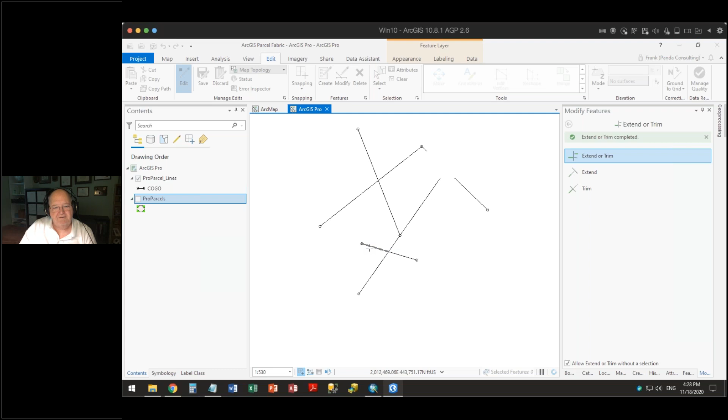My machine is actually backing up right now. So it does do an extend, it does do trims on here. It does both of these using this extend trim function.

Let me go and create another couple lines here, and then show you also just a normal construction type line. There's a line intersection tool.

So I can say go ahead and take this line and extend it to here, and it will extend those. Or if I go back and say don't create new lines, just extend these lines here, I can take this one and extend it, and it will go and extend them.

Do they actually have vertices on here? No, they do not. It actually has truly extended those out for me.

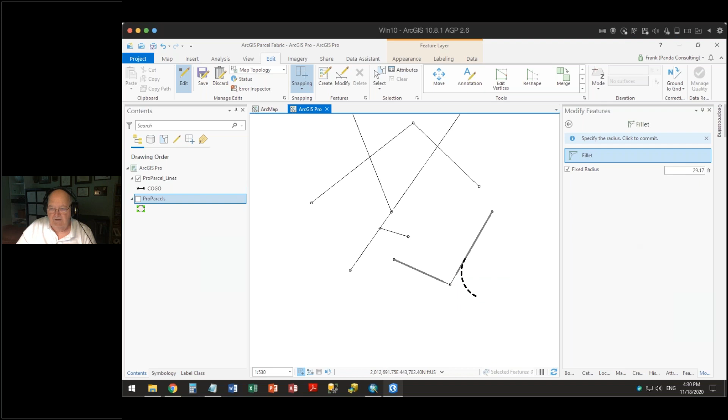There is also a Fillet Tool. I can tell it a fixed radius, but let's just do it this way, this line, and I can tell it where I want, or I can right click and say a 30-foot radius, and then all I have to do is tell it what side, and it will automatically trim them up. And if my lines are COGO, it will automatically calculate the COGO for me on here.

So let's go and do a couple more things. Again, this, because it's supposed to be about parcels. So let's get this one, and let's go here and actually update the COGO on these.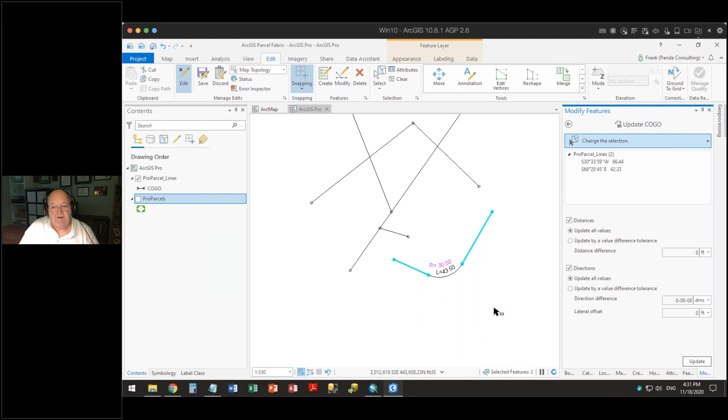And with the update COGO, which used to be called calculate COGO, I can tell it to update everything or only update it if it's beyond a certain variance. If it's more than 1 foot difference, update it. If not, leave it the same. I'm just going to tell it to do all of them. All right, so there they are there.

So that's update COGO. So we've shown you the traverse tool, the update COGO tool.

Let's go and select a line here and do a cul-de-sac on that line, from the endpoint, showing that the road is 25 feet wide with a 60-foot radius. Oh, I want to hit the start of the line instead. 60-foot radius, and I want to come back 20 feet on here and tell it to create those. It will create those lines for me automatically. Again, this is set up to do much faster input, much faster calculations as we're going on this. And you can see it's actually gone and calculated what the length of those lines are and what the radius is on each of those.

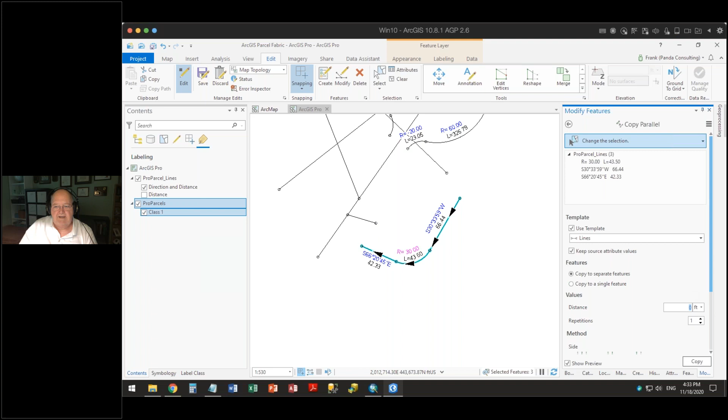So if I have these lines that I have here, let's go back to modify and do a copy parallel. This might be a little better if we actually show the bearings and the distance rather than just that. So I can tell it to take these lines and copy them as individual discrete lines, doing it 25 feet on each side. I can do it on both sides or just one side. I can tell it how to miter it. I can tell it to align the connected lines in here.

Notice one of the things you have on ArcGIS Pro is you almost always have this show preview, where it shows you what it's going to do before you actually tell it to do it. When I say go ahead and copy them, they automatically calculate what the COGO values are for those lines that I just copied and made parallel. So here, this has got a 30-foot radius, but this has got a 55-foot radius, and this should have a 5-foot radius if I zoom in enough to see it. It automatically also calculates these values here, so if there was an intersection, it would calculate those also.

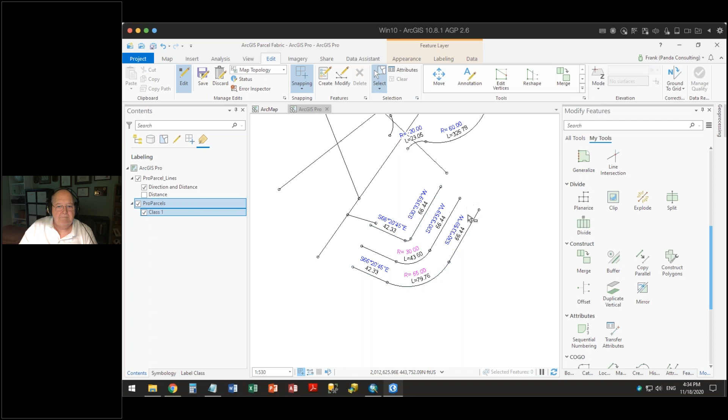If I go in here, let's just take a line and split a line. Well, let's not split it, let's divide it. Now, earlier you saw me divide a polygon, and I'm using the same exact tool to divide a line. There is no difference now in Pro by design. You don't have two or three or five different tools, one for each of the different variations. You have one tool to divide, one tool to split. It understands what you have selected and goes to that.

So now if I want to split a line, I can split it by a distance, equal parts, percentages, or I could do a single distance, multiple equal distances, or varying distances. Let me just do a single distance. It tells me it's 66 feet, and I'm going to do it from the start of the line. So let's just do 20 feet off of it. It tells me 20 feet from the start of the line, or I could do 20 feet from the end of the line. It's going to come out there. And when I say divide, it automatically divided the 20 feet on here, and it wasn't quite sure how to handle this.

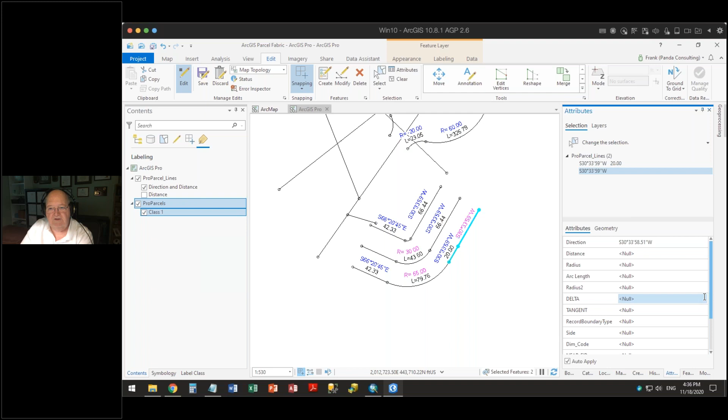So I can now go to this one and calculate what that distance is, either by doing an update COGO or actually just inputting that value here. That would be 46.44 feet. And notice when I do that, it will go and change it from pink or red to black.

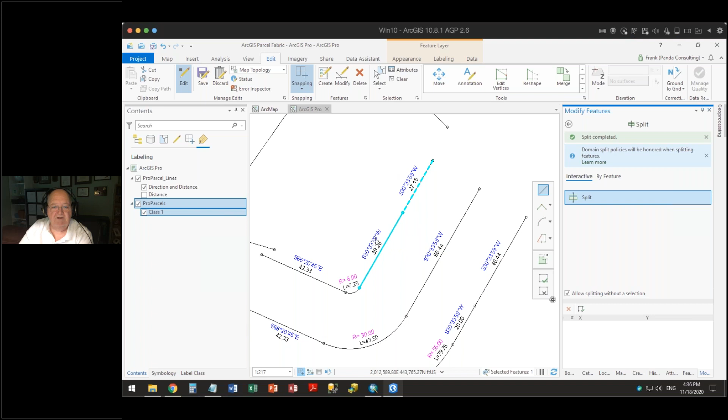So now if I've got this and I go to a split instead of this, I can just split this interactively there. Automatically with a split, it will calculate what my COGO values are. It understands that these are COGO lines and that you wish to maintain these values. So if there is a COGO value in there, it will go and calculate what that new value is. Again, because it's numbers and not text, it has the ability to update them as you go, and you don't have to update them any longer.

Let's see what else we might have. Split, planarize, generalize, buffer, construct.

So if I have a set of lines, let me go and just create a line across the end here, and I'm going to select this line, and this line. I'm going to unselect my polygon. I'm going to go back here and say construct a polygon and cluster tolerance, and use... notice it did not let me go build a polygon because all of my polygons were turned off. So there is some intelligence built into this.

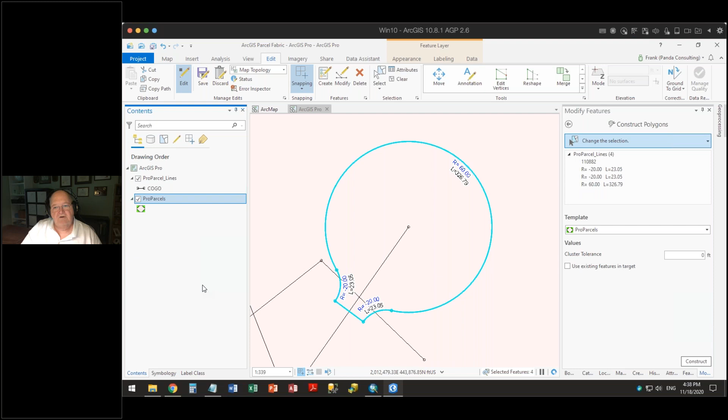So I can now go and build that. That is now on here. There's my polygon and my vertices of my polygon on here. It then goes and shows them to me.

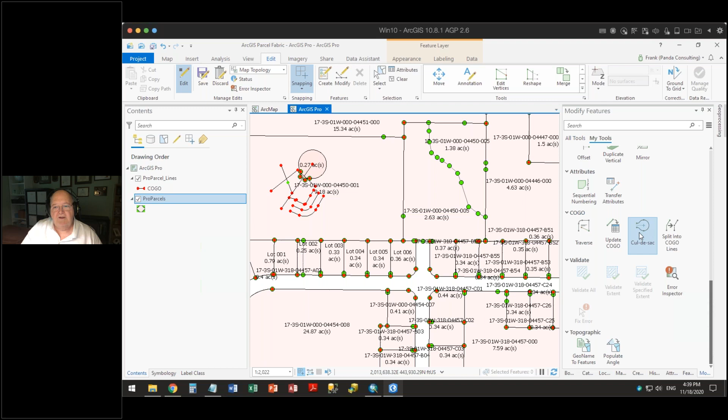In the meantime, let me show you one more thing. One challenge parcel mappers face is when we get a right-of-way map from the Department of Transportation. Right-of-way maps, for the most part, have a described center line, which might be a baseline of a road, and the actual rights-of-way are described relative to that baseline. So it doesn't use bearings and distances, it uses what's called stationing and offset.

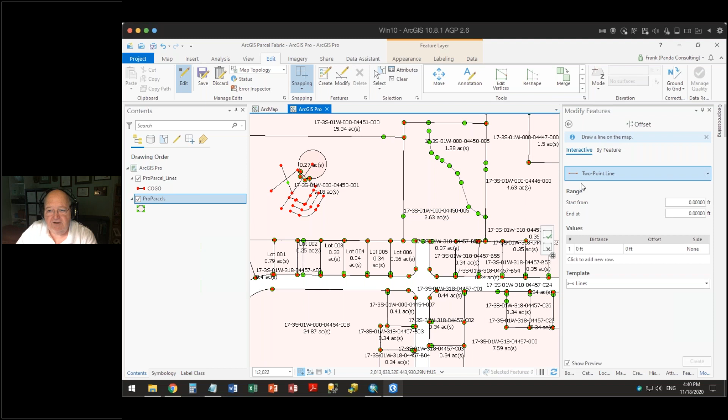So in here we can interactively draw the baseline, or we can have an existing centerline feature. In this case I'm just going to draw it on here. There's my baseline. It tells me this baseline is 296 feet long, and I can tell what the stationing is, so maybe it's 10 plus 0, 0 is my stationing, and that's my ending point.

Now what I can do is tell it how far along that baseline my measurement is, and whether it's to the right or the left. In this case I can go 100 feet, and it is 15 feet to the right. My next one is 125 feet along and it's 20 feet to the right. My next one is 200 feet along and it is 40 feet to the right.

And I'm using my lines here. I can say go ahead and create these 2-point lines... I did not do it, let's go and do this again. There it is. So there they are in there. It goes and uses how far off it is - this is 15, this is 20, and then it goes to 200, and then it's 40.

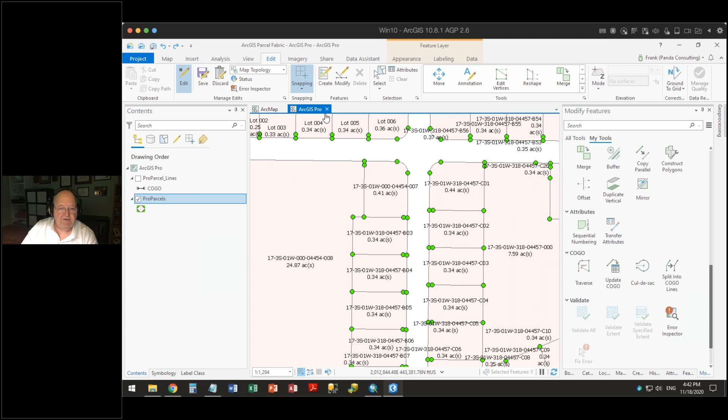If we do have, for example, a road taking here - if we have this parcel going and dedicating a portion of road out here, we can do a reshape on that and say let's take this, go parallel here for a distance of, I think this is 40 feet here, and we go parallel here, and then we can go click back here. It will automatically allow you to go and do takings or vacations or abandonments of roads on here using, again, simple tools in ArcGIS Pro.

So what we've done is talked about very simple types of tools that we can use for editing. But inside ArcGIS Pro, we can build much more complex feature templates, so that when I build a polygon, I can also automatically have it create the lines for me. So again, it can be as complex as you want or as simple as you want.

The other thing I want to remind everyone is that this is not using the parcel fabric, so you can edit shapefiles - although I would not edit shapefiles, because shapefiles have densified curves on them. You can edit a file geodatabase. You can edit this in SDE because it's not a parcel fabric. You could also edit this on ArcGIS Online if you had it up there. So it allows you to have multiple variations. It does not allow you to edit personal geodatabases, but it is flexible enough to do all the others.

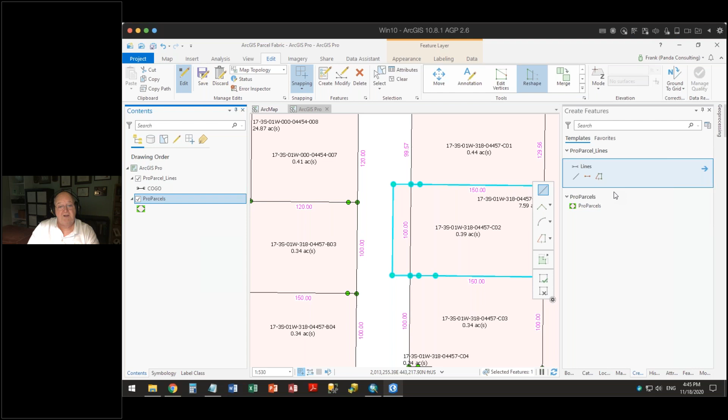We didn't have any more questions come in, although several people did respond that they were mesmerized as well. One thing I noticed watching this - I'm not really a parcel editor, I consider myself a parcel user, so I use the parcel layer for my mapping. But what are your thoughts on using this as a tool for a zoning administrator updating zoning parcels? Here in Thomasville, some of our zoning goes 100 feet from road centerline as commercial, and beyond that is R1, so you have dual zoned parcels.

Let me give you my opinion on this first, and then we'll go from there. If I had another layer in here, like a zoning layer or comprehensive land use plan or future land use plan, the tools inside Pro are so much easier to work with than the old ArcMap tools - things like these alignment tools, the transform tool if you need to move something over to make it fit, the align edge tool for closing in on things, and the align features tool to make sure your zoning layers are coincident with your parcel layers. There's nothing worse than having parcel mappers remap a couple parcels, and then suddenly all the other dependent layers are out of alignment. The align edge and align features tools are very useful for quickly going in and fixing these things to fit.

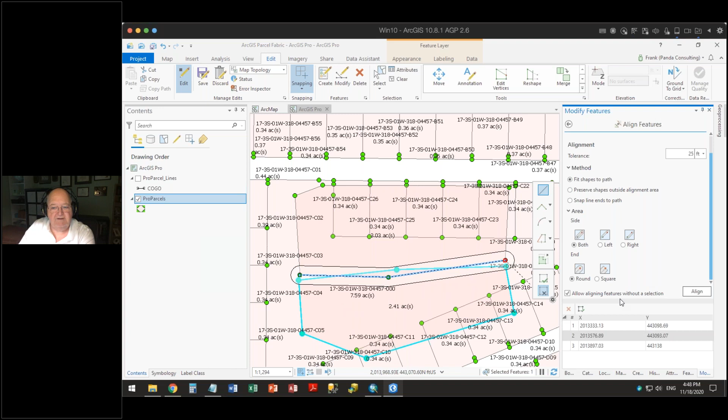By default it comes out to trace. So I can go to trace and say trace instead - here to here to here, that's the boundary. If I set this out wide enough to capture that area, round it off at the end, and tell it to realign the adjacent zoning so it fits, we get rid of any overlaps or gaps between them. That's one of the things we can do.

We can also go in here and say, well, if we know they're coincident on both ends and we just have problems in the middle, we can use the align edge tool. As long as map topology is turned on, we select this one and move it over so it's coincident, closing that up for us.

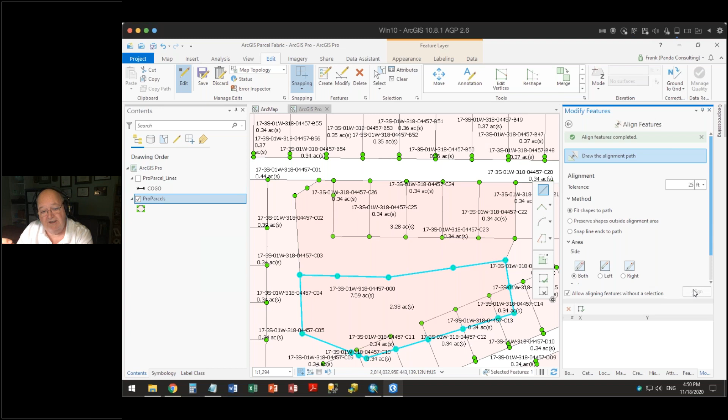So those two tools by themselves are really important for keeping our data as clean as possible. The other thing is there's a change in our parcels, and maybe we're supposed to be coincident with that new road taking. Again, we can draw where it's supposed to be and say go ahead and realign that, and it will automatically realign all our existing data to fit. The tools inside Pro are perfect for maintaining your data as quickly as possible and making sure it stays coincident, even if other departments are changing and fixing things along the way. The only thing you have to do is make sure you understand or have a way to identify what has been changed.

So to answer your question, yes, the new edit tools are much more efficient. They're advanced light years beyond what we used to have inside ArcMap, much more efficient in what they're doing. And once you learn how to use them, the sky's the limit.

That was definitely impressive to see how quickly and easily this works. I spent many a time when I was first in the planning department realigning the zoning layer to the parcel layer, and giving up on some layers, saying okay, it's close enough - which was not right, but this looks good.

I don't see any other questions that have come through. Do you have anything else in the last few minutes before we close up? No, I don't think so.

Like I said, there's so much in here you can go through. I do want to mention one more thing. Early on when talking about labeling, I mentioned how you could use Arcade, the new scripting language, to label things. Arcade is also great for doing things on the fly, like creating an intersection with another layer.